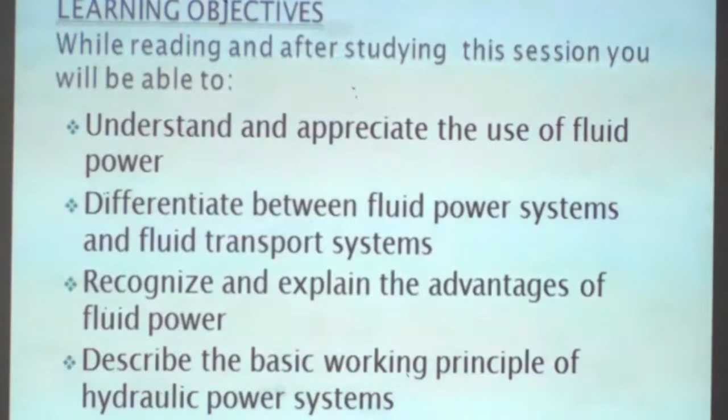After studying this session, you will be able to understand and appreciate the use of fluid power, because this hydraulic valve has power. Differentiate between fluid power systems and fluid transport systems, recognize and explain the advantages of fluid power, and describe the basic working principle of hydraulic power systems. At the end of this session, I hope that everybody who watches this session is able to do these objectives.

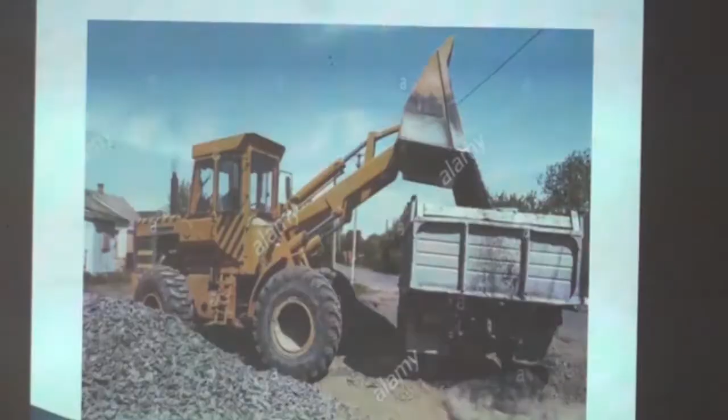The fluid system is applicable on vehicles which unload themselves. For example, to unload stones or sand, the driver uses the hand lever on the directional control valves, which gives the fluid direction to lift up or drop down the body of this vehicle. This system is also used on heavy hydraulic cranes to pack other vehicles. This is an example of hydraulic cranes which pack other vehicles. This is another hydraulic crane which loads sand into other vehicles.

On these hydraulic cranes we have some components. For example, this part is called the hydraulic cylinder. It has the rod. This load can go up or forward for lifting the sand to the other vehicles. That's the reason why we are going to deal with this piston. It works with hydraulic fluid.

This system has some advantages. Almost unlimited power can be produced and maintained. This hydraulic fluid system is to be maintained. An advantage of fluid power systems is that almost unlimited power can be produced and maintained. And easy and complete control: it is very easy to control and to maintain.

A natural springiness that can absorb and reduce the shocks in the system. This means the system is very comfortable because we use fluid. The components can be at a distance with quick power transfer and little power loss. When we use these fluid power systems, there is no need for more power because there is little power loss.

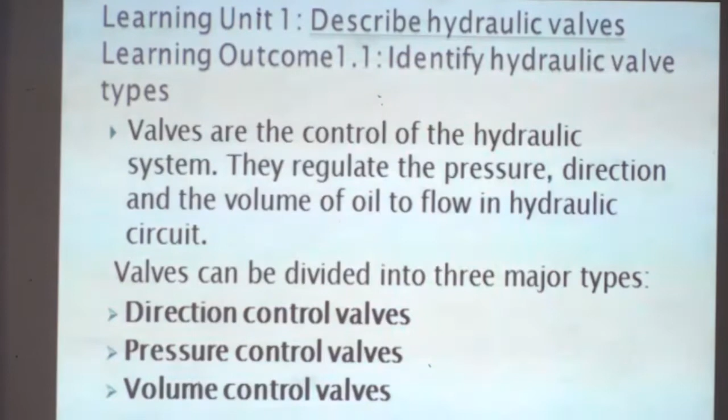This means we have three main types of valves. These valves can be divided into three major types: directional control valves, pressure control valves, and volume control valves. These are the three major types of valves we use in our hydraulic systems.

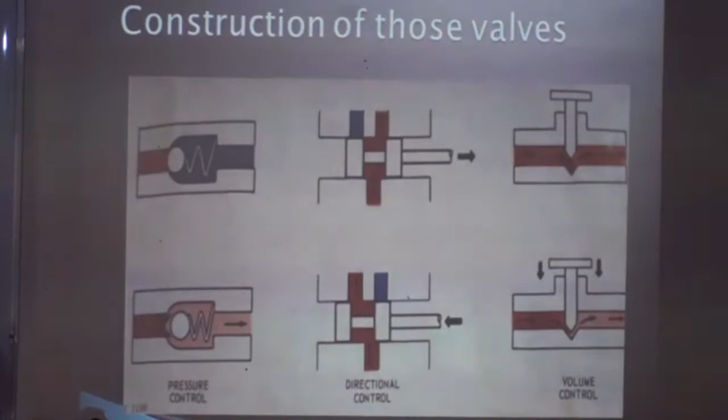As we see here, this is the pressure control valve. On the first figure, we have two colors on this pressure control valve, a red one and a blue one. And this one is the ball. Then this is the spring. As you see, in the second figure, we have an arrowhead. As you see, this ball is open; it is not attached on this part here, compared with the first figure, which completely closes this spot.

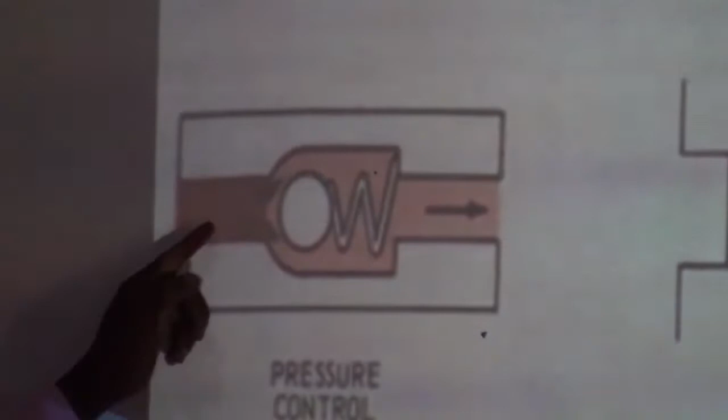On the second figure, the ball gives the passage through which the fluid comes from this side to the other side. It's the reason why we have the arrowhead. That means the fluid flows in this direction. This ball is opened by the fluid pressure: the fluid pressure comes to this side, then compresses this ball, compresses the spring, then the fluid passes through this spot and goes to the other side to do work or to lift.

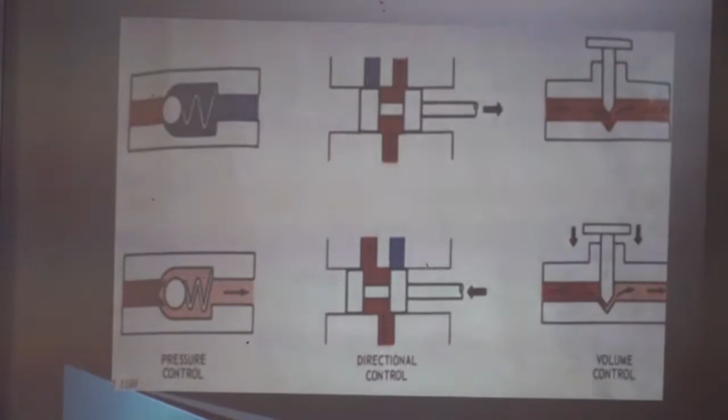As we have seen at first, this fluid can lift up the body of some vehicles, or it helps to park other vehicles on hydraulic cranes. Then we have the second figure, which is called the directional control valve.

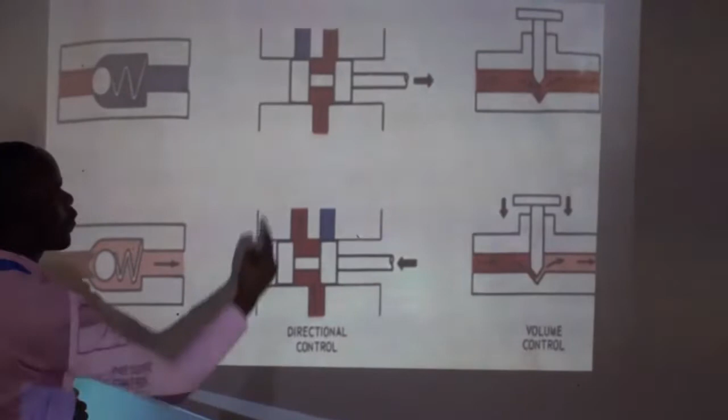Directional control valve means what? On the first figure, we have the arrowhead that shows this load goes forward. This port is communicated with this port. The fluid comes from here, passes outside of this load, then passes to the other port. This port, as you see, is still closed, but this port is opened and is connected, or communicated, with this port when this load goes forward.

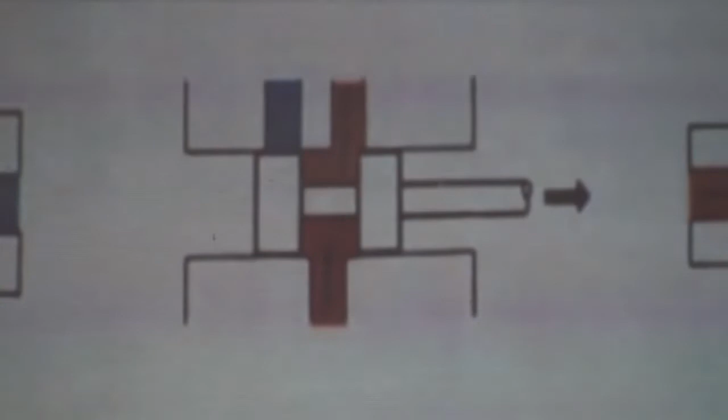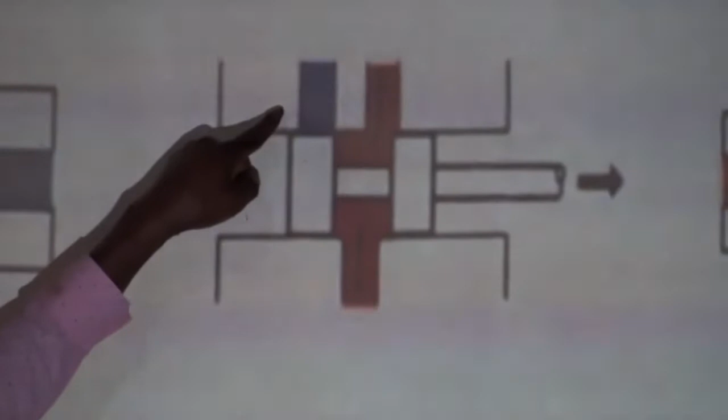But on the second sketch, this load comes back, because we have the arrow which indicates the direction, that is, the load comes backward. This red one is the fluid pressure. Fluid pressure on this spot is communicated to this spot, as differentiated from the first figure. The red color goes from one port to the second port. Means this port is communicated to this port. This port is closed. This is the directional control valve.

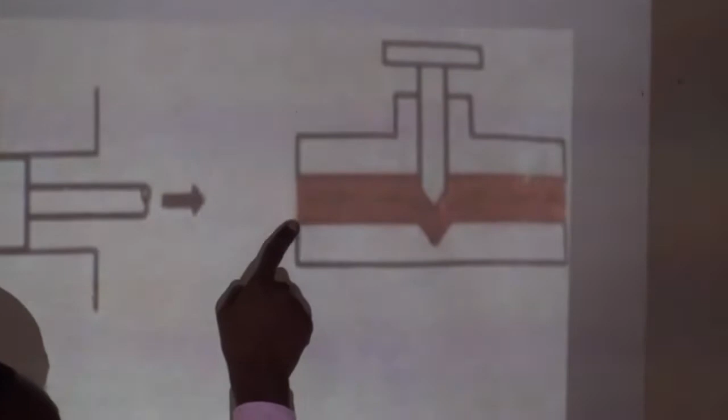On the last figure, we have the volume control valves. This volume control valve shows how the volume or the rate of the fluid passes through the hydraulic systems. Here on the first figure, we have the red color only, but as you see, this adjustable nut gives the space here. This arrowhead shows that the fluid goes through freely on these volume control valves. We see that the adjustable nut goes down.

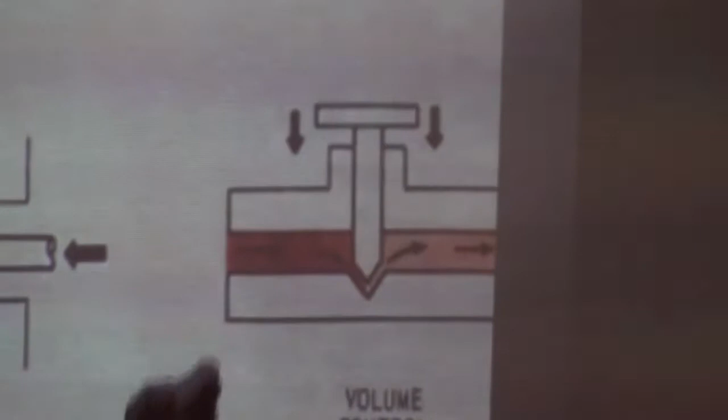When you screw down or decrease this volume or this space, the fluid passing this spot decreases compared to the next part. This is the volume control valve. This volume control valve adjusts or regulates the quantity of the fluid that flows through our systems.

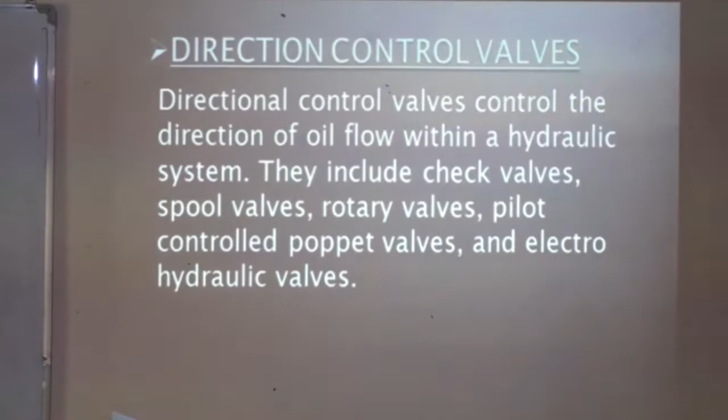Let's go to the directional control valves and show how they function. The directional control valves control the direction of oil flow within any hydraulic system. They give the direction or orientation of the fluid in our systems. They have subtypes of valves: check valves, spool valves, rotary valves, pilot controlled poppet valves, and electro hydraulic valves. Those are the subtypes of the directional control valves.

Let me go on to the volume control valves. Those volume control valves, or flow control valves, are used to reduce the rate of flow in a section of a hydraulic circuit. It's to reduce the quantity of fluid flowing in our hydraulic circuit, resulting in slower actuator speed. Needle valves and flow control valves regulate oil flow in one direction, allowing free flow in the opposite direction.

Then let me go on to the pressure control valves. They are found in virtually every hydraulic system, and they assist in a variety of functions, from keeping system pressures safely below a desired upper limit to maintaining a set pressure in a part of a circuit.

These pressure control valves, as a function, keep systems working at a constant pressure, without changing the pressure we need in our hydraulic system. This pressure control valve maintains a constant or set pressure we need in our system.

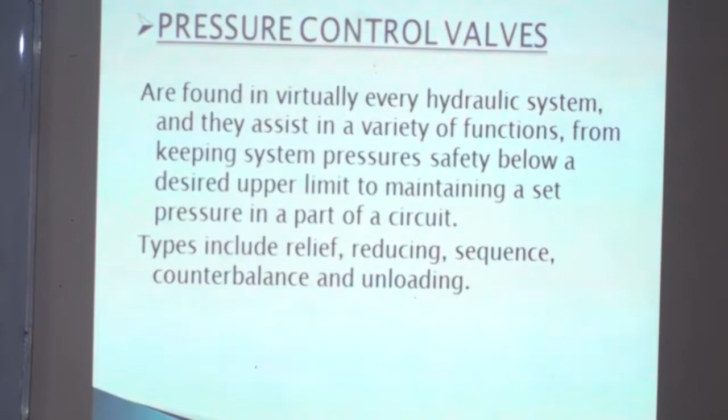The types of pressure control valves include the subtypes called the reducing, sequence, counterbalance and the unloading valve. Then we have other valves called the non-returning valves. These non-returning valves have the function of allowing a medium to flow in only one direction. These non-returning valves allow the fluid to flow in one direction without reversing in the other direction.

A non-returning valve is intended to ensure that a medium flows through a pipe in the right direction, where pressure conditions may otherwise cause reverse flows. The second function of these non-returning valves is to give orientation of the flow of fluid in the direction of our systems.

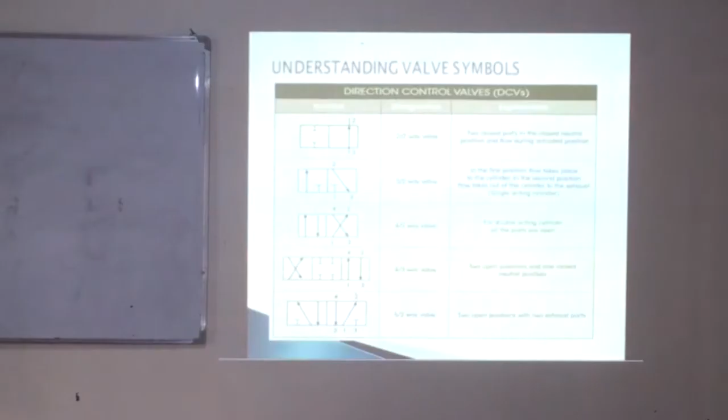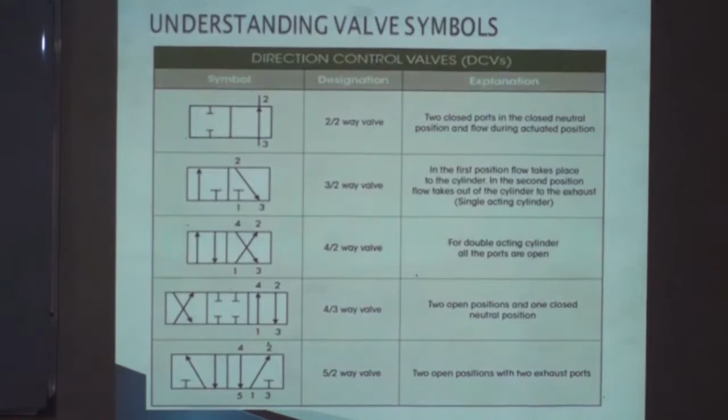Those valves have symbols. We use many types of symbols in our hydraulic circuits, in our hydraulic systems. We start with the directional control valve symbols. Understanding valve symbols: we have many different types of symbols. Here we have the symbols we use for the directional control valves. The first one is called the 2/2-way valve. 2 means what? 2 means what?

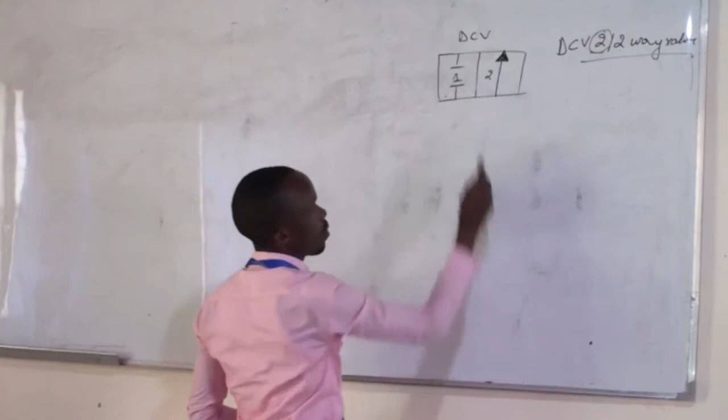On this type of directional control valve symbol, that is the directional control valve called the 2/2-way valve. The first two means 2 ports. The second two means the number of positions. On our directional control valve symbol, this is the position. This is position 1. This is position 2. That's the reason why we have 2 positions. And that 2 means the number of ports in each position.

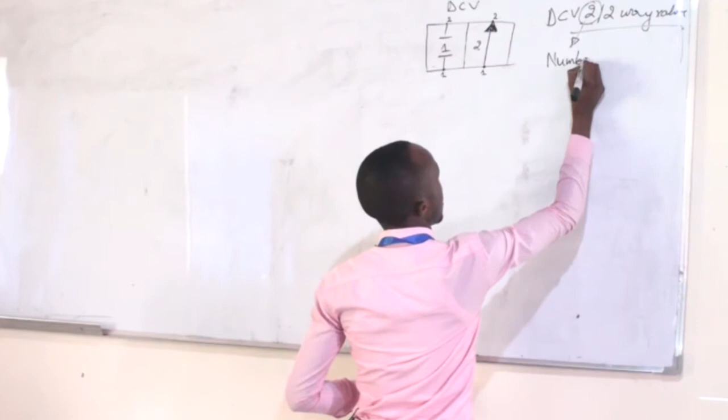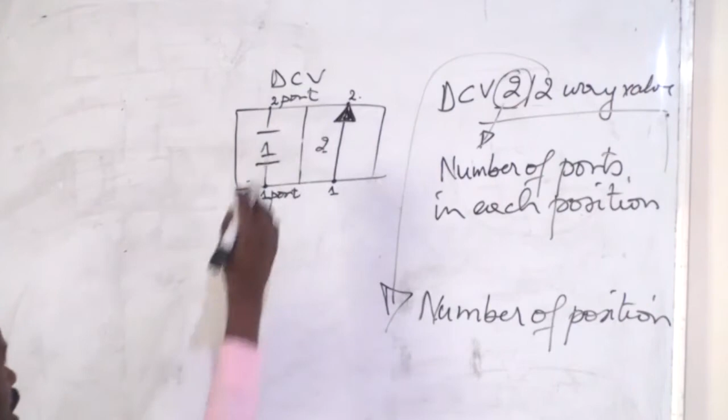Yes, the port. This is port 1. This is port 2. In each position, even in the second position, we have two ports. This is port 1. This is port 2. Yes. We have seen that the first one is the number of ports in each position. The second 2 is the number of positions. I'll show you. This is port 1, port 2, in each position. This is position 1, this is position 2.

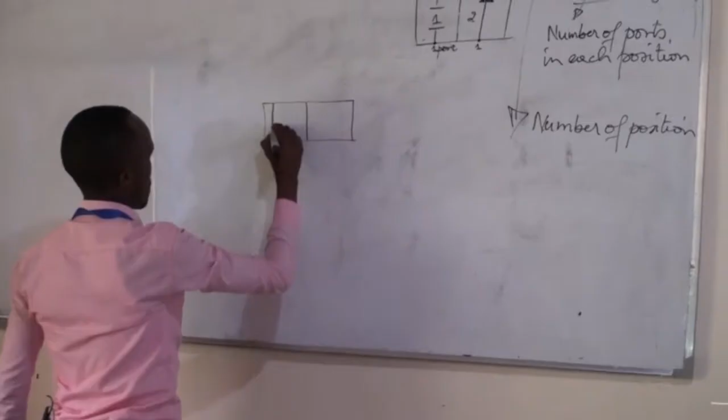Yes? Let's continue with the directional control valve called the 3/2-way valve. This directional control valve is different from the first directional control valve. This is the symbol of the directional control valve called the 3/2-way valve. Means what? This is the number of ports. Then 2 is the number of positions.

We have seen that this is port 1, port 2, port 3, in each position. In the second position, you have port 1, port 2, port 3. This is the first position. This is the second position. This is what we have: 3 ports. Then we have the number of positions.

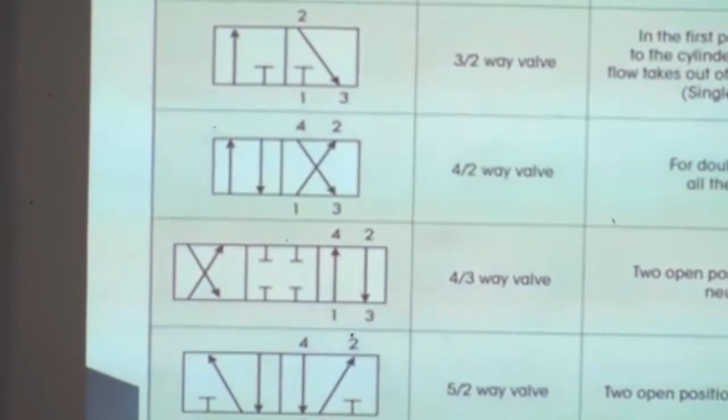Number of positions. Let me continue through the other symbols of directional control valves, called the 4/2-way valve. Means what? This type of directional control valve has 4 ports, 4 ports in each position. This is the port. This is the port. As you see, this type of directional control valve, called the 4/2-way valve, is totally different from the first types. So this is position 1. Then in the second position, we have port 1, port 2, port 3, port 4.

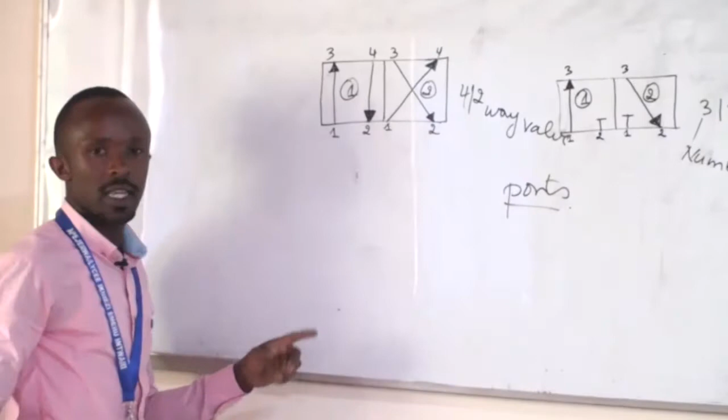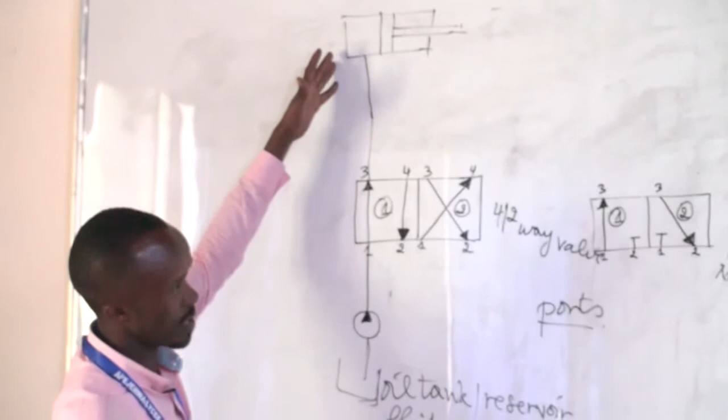Let me explain what is called the port. The port is where the fluid enters inside the directional control valve, and where the fluid goes out of the directional control valve. For example, in our hydraulic circuit, we have another component called the hydraulic pump. This pump takes fluid from the reservoir. Then this fluid goes up to supply the hydraulic cylinder with pressure.

Then we have other directional control valves, called the 4/3-way valve. Let me explain the directional control valve called the 4/3-way valve. We have the symbol. As you remember, this 4 means the number of ports. The 3 is the number of positions.

On these types of directional control valves, let me show you the number of ports. Firstly, let me show you the number of positions. We have position 1, 2, 3. This is the number of positions. Then you have the number of ports on each position. We have port 1, port 2, port 3, port 4.

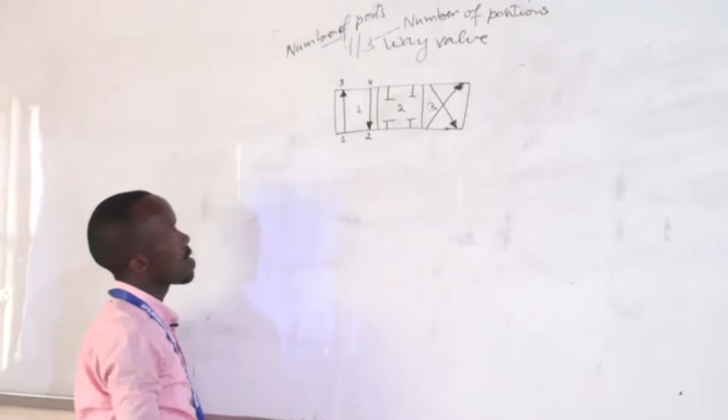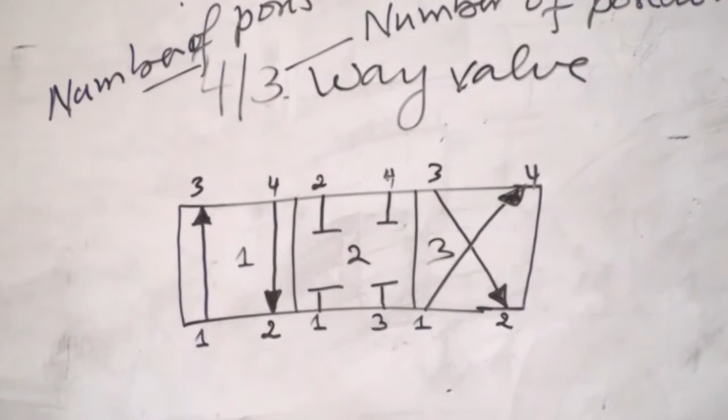On the second position, we also have 4 ports: port 1, port 2, port 3, port 4. Then, in the third position, we also have the 4 ports: port 1, port 2, port 3, port 4. The same as the previous directional control valves, this is the directional control valve called the 4/3 way valve, the symbols.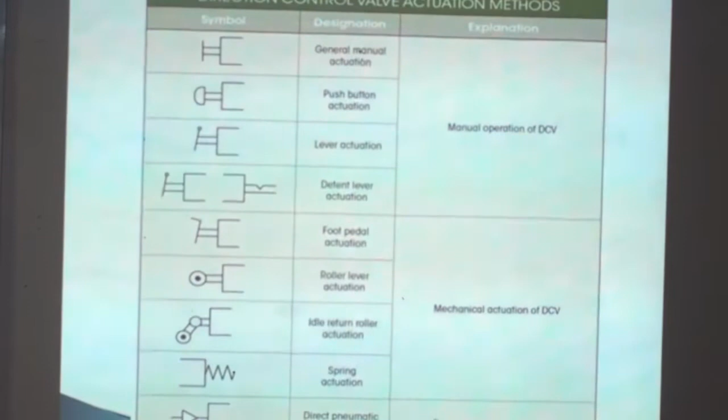These types of directional control valves have an actuation method. On this position, we need to change the positioning according to the work you need to do. For example, these directional control valves are used on hydraulic cranes. When you need the cranes to load other materials, for example stones or sand, we need to select or actuate the directional control valve.

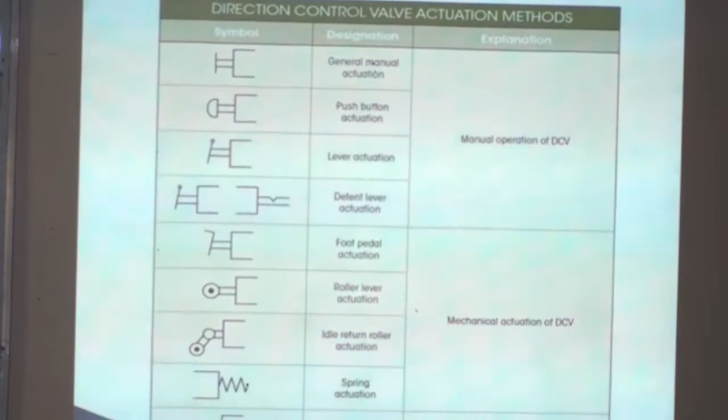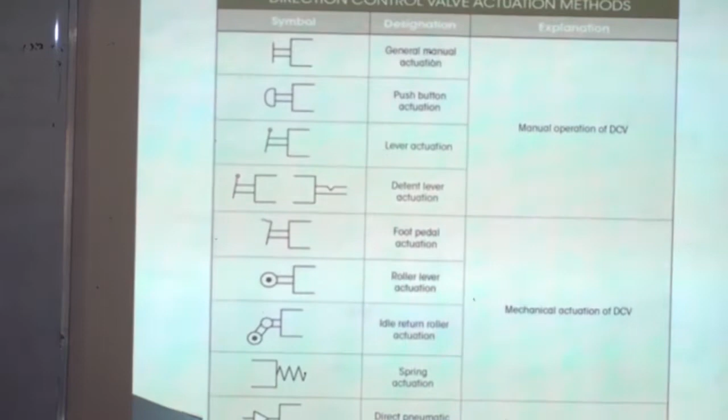That's why directional control valves have a method of making an action which lets the cylinder on the hydraulic crane actuate or do work. We have the symbols of the actuation method, and I'll show you how to add the symbols to the directional control valve. For example, we take the symbol called lever actuation or hand lever actuation. We put this hand lever actuation on this side of the valve.

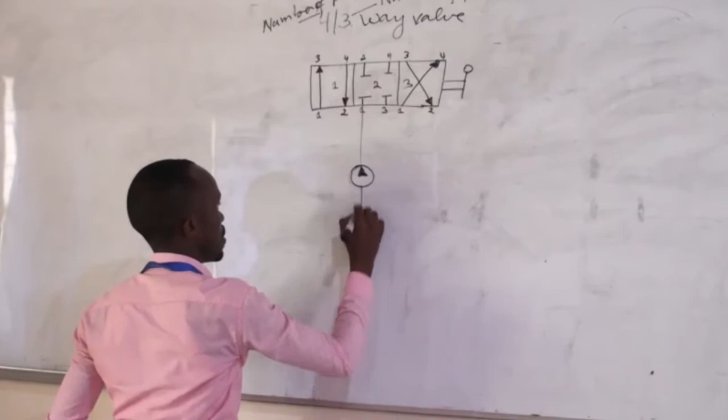This is the symbol of lever or hand lever actuation, which actuates this directional control valve in order to do work, bringing the fluid from the hydraulic pump, coming from the hydraulic tank or hydraulic reservoir. This fluid goes to the cylinder. For example, this is a simple sketch or simple circuit showing how the fluid circulates in our hydraulic system.

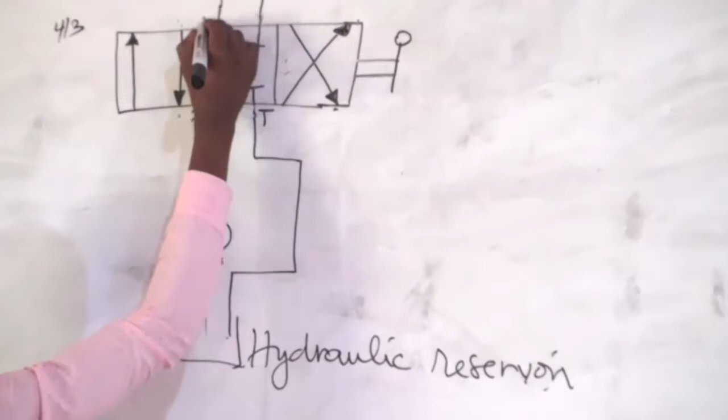As you have seen, this is the number of ports. Let me clean this one, then the number of positions. Let me show you how to actuate this hand lever actuation on the directional control valve called the 4/3 way valve. This port, when connected to the hydraulic pump, is called P. This port is called T. This port is called A. This port is called B.

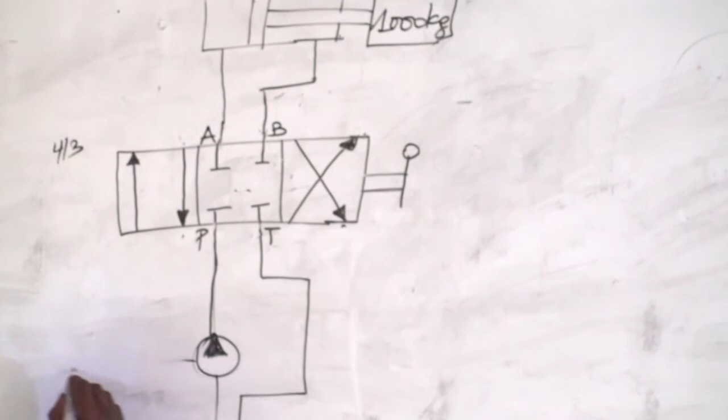Let me explain these letters. P means the fluid pressure from the pump, supplied to the cylinder to do any work. For example, on this cylinder we have a load. This fluid comes from the hydraulic tank or hydraulic reservoir through the hydraulic pump. This pump supplies the fluid with pressure to the cylinder, passing through the directional control valve.

As you see, in this position there is no connection between port P and port A, and no connection between port T and port B. This means this position is the neutral position, called 0. This means there is no action on the hydraulic cylinder. If you need to do any action on the hydraulic cylinder, we actuate this hand lever actuation.

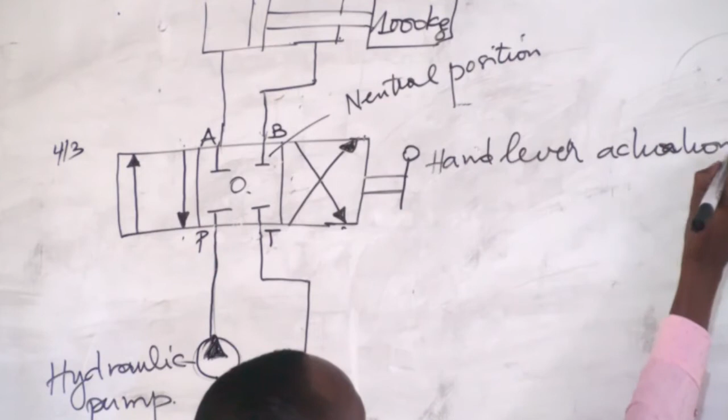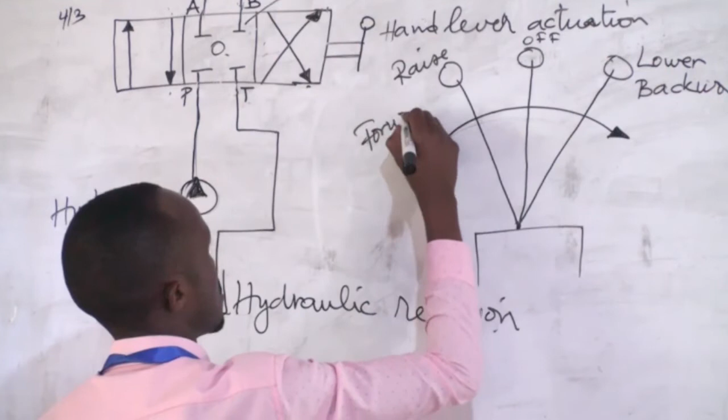This is the hand lever actuation. Here it has three positions. The first position is off, the neutral position. This position is called lower, or backward. This position is raise, or forward. Let me explain how this lever is actuated in order to lift up this load or return the hydraulic cylinder to its initial position.

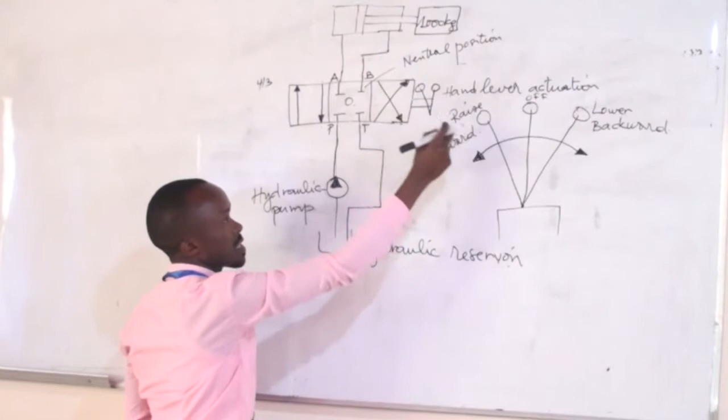When you select this hand lever in the raise position, the lever comes into this position, same as here. When selected in this position, this is rise. What does it mean? Port P is connected to port A. Then port T is connected to this port. Port A is connected here, and port B is connected to this port.

Let me show you how it is. This is port P from the pump. This is port T from the cylinder; let me clean this port. Then port B is connected to this one. When the pump rotates, the fluid is supplied from the hydraulic reservoir to the hydraulic cylinder. This is the hydraulic cylinder.

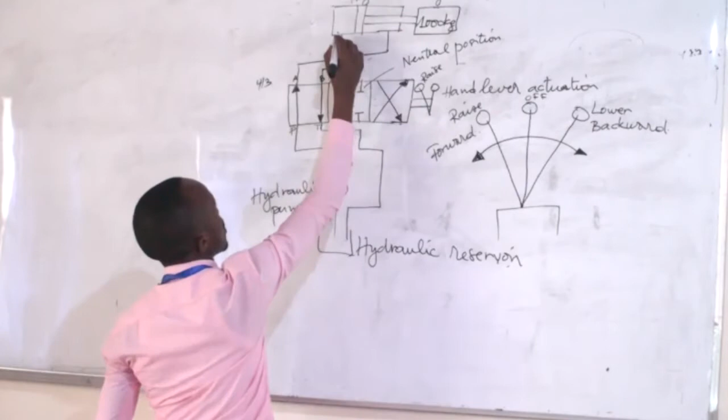This is the hydraulic cylinder. It passes through this directional control valve. The fluid comes from the hydraulic reservoir and passes through the hydraulic pump. In this port, P means the pressure, or from the pump. It passes through this way. This way is connected to port A, then passes into this chamber. The fluid comes into this chamber with high pressure.

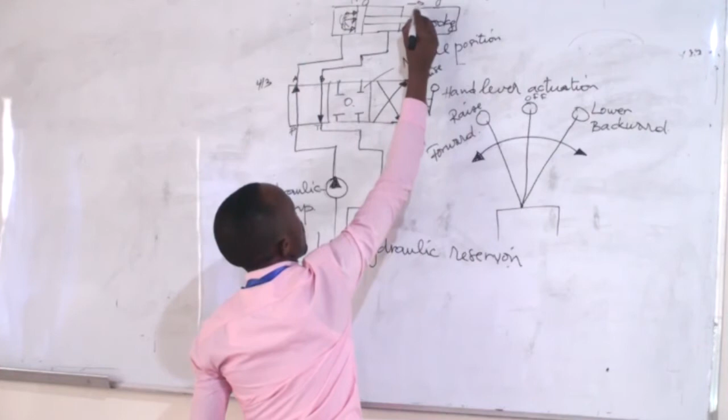Then it presses or pushes this piston. This piston is connected to this rod. This rod comes in this direction or comes back. Forward, it goes up or lifts this rod. Then here we have the other fluid in this chamber. This is called the rod chamber.

This fluid comes from this way, then port B is connected to port T. T means tank or reservoir. Means what? This fluid comes back to the reservoir. This is when you select or actuate the hand lever in this position for rising or for forward.

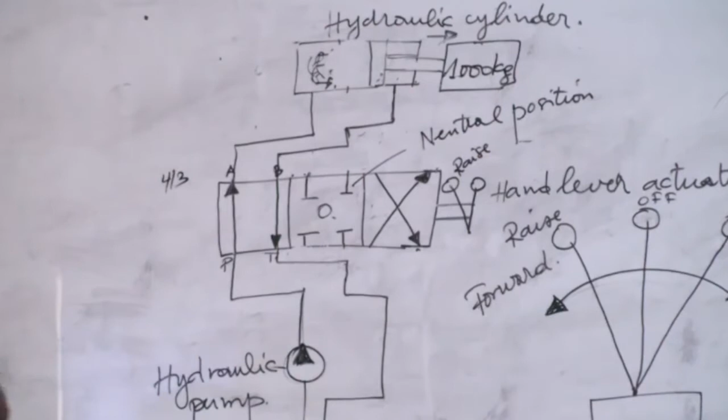Then let me see how this rod, at the end of this action, for example, comes here. So we need this rod to come back to the initial position. That's the reason why you need to select or actuate the hand lever in the other position, the lower or backward position. You have just seen that this rod comes out, lifts, or moves forward in the hydraulic cylinder.

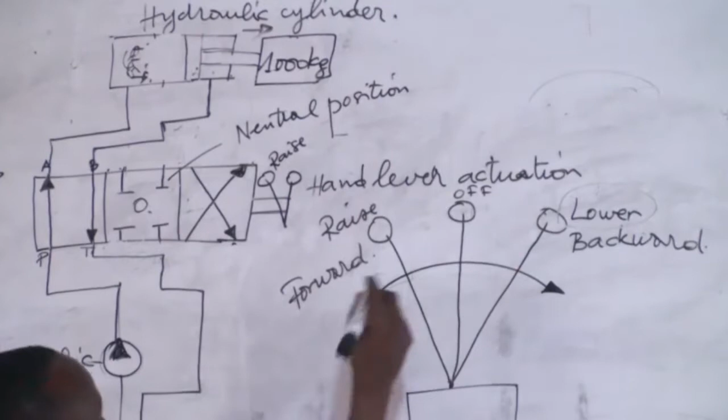Means what? We need to bring the piston and the rod inside. We need to actuate the hand lever in the lower position. We need to do this one. This is the lower. When you select or actuate the hand lever in the lower position, the directional control valve changes position. This port is P, this port is T, this port is A, and this port is B.

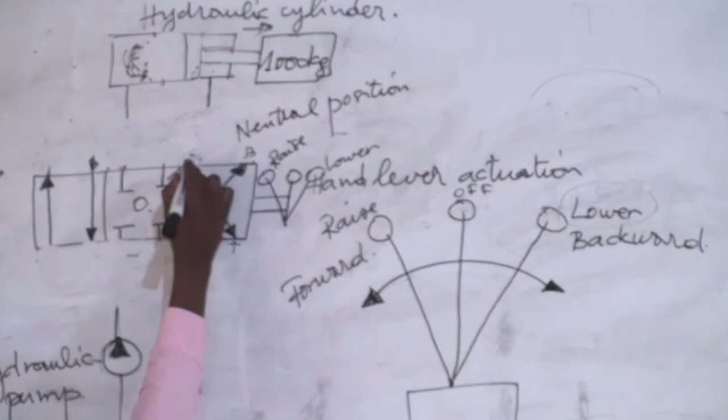Let me show how those connect. Yes, this is port P, which comes from the hydraulic pump. Yes, connected to port P. Then T is the return to the tank or the hydraulic reservoir. That's the reason why we must connect it to the return. Then the port A.

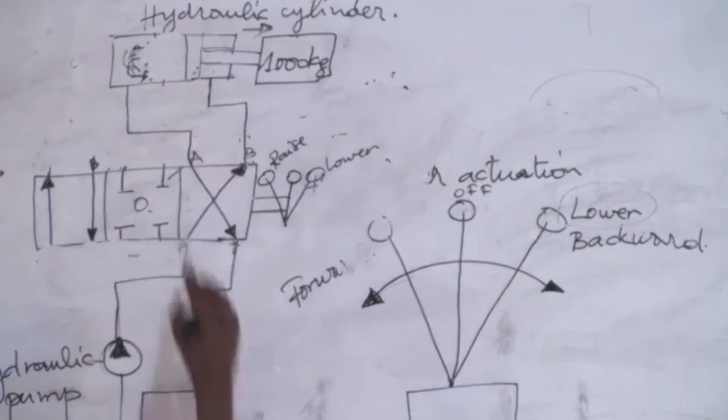This hydraulic pump gives the fluid pressure, which comes from the pump through port P to port B. This fluid pressure comes to this chamber, called the rod chamber. Then this fluid applies pressure to the piston and pushes it in this direction. Means what? This rod and the piston come back to the initial position.

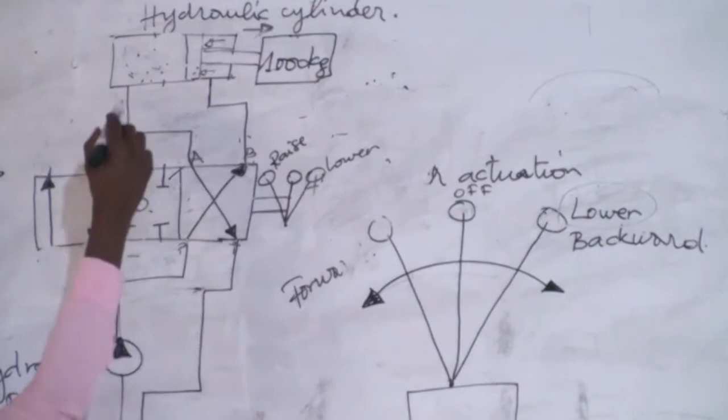Then the fluid that was in this chamber, called the piston chamber, comes back to port A. Then this fluid goes to T. T means the tank or the reservoir. Then it comes back to the hydraulic reservoir. Means what? Finally, the rod and the piston come to the initial position.

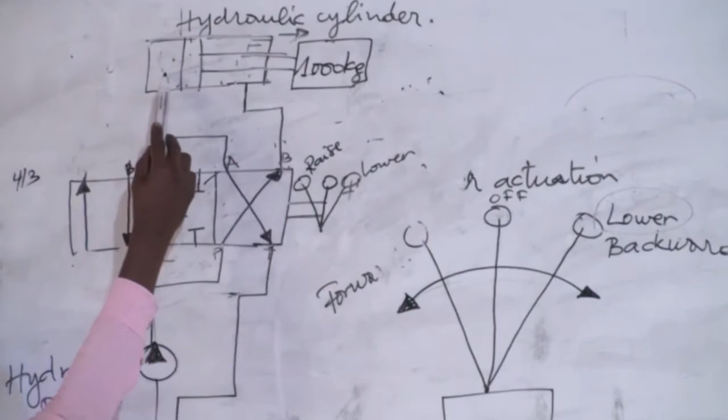Because the fluid pressure comes from the pump, passes from port P to port B, comes into the rod chamber, and pushes or presses the piston to the initial position. Then the fluid in the piston chamber goes from port A to port T, back to the hydraulic reservoir.

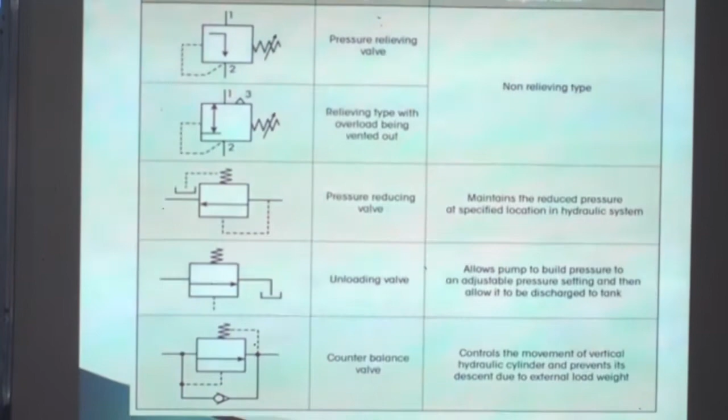Let me continue with the pressure control valves. We have different types, or different symbols, of pressure control valves. As you have seen in the symbols, in general, the function of these pressure control valves in our hydraulic circuit is to reduce or protect against overpressure, in order to avoid this pressure destroying some hydraulic components. That's the reason why we install these types of pressure control valves in hydraulic circuits.

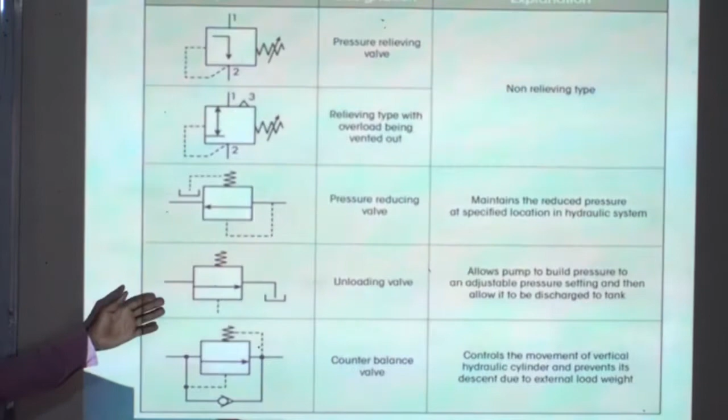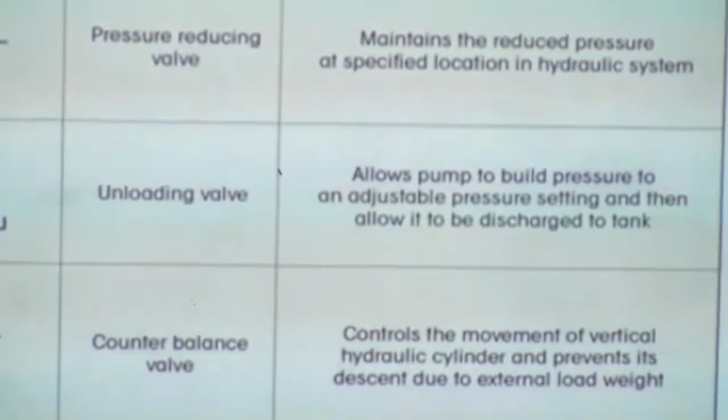For example, here we have what's called the unloading valve. This unloading valve allows the pump to build pressure to an adjustable pressure setting and then allows it to discharge to the tank. When we have high hydraulic pressure in our circuit,

this unloading valve permits the fluid to come back to the tank, discharging this fluid pressure to the tank, in order to avoid this pressure destroying the hydraulic components. For example, this high pressure can destroy directional control valves or the hydraulic cylinder. That's the reason why we have pressure control valves functioning in our circuit.

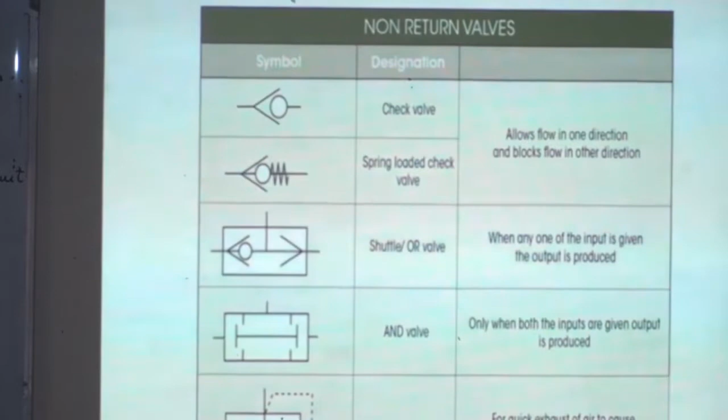Then we have the last valve, called the non-return valve. We have many different symbols of non-return valves, but their function is to permit the flow of oil or fluid in one direction and block the flow in the other direction. For example, we have what's called the check valve.

This is the symbol of the check valve. This check valve permits the fluid to flow in one direction and blocks it in the other direction. This valve is composed of, this is the ball.

This is the ball. The fluid comes from this direction. This fluid is passing through these check valves, can pass through these valves because this fluid comes in with pressure. Then this pressure of fluid presses this ball, then lets it pass through this port. Then the fluid continues to pass on the other side.

But otherwise, when the fluid comes from this direction, this fluid has more pressure. Then this pressure presses this ball to this port, closing it totally so the fluid cannot pass on the other side. It's the reason why it's called a non-returning valve.

As you have seen, its function is to allow flow in one direction and block flow in the other direction. It permits flow in this direction, but blocks it in this direction. As we have seen in our hydraulic system, here we have a simple circuit. Let me show you, let's watch the animation on how the hydraulic system or hydraulic circuit works.

Hi, welcome back. With the help of this animation and explanation, let's learn how a direction control valve and hydraulic ram exactly work.

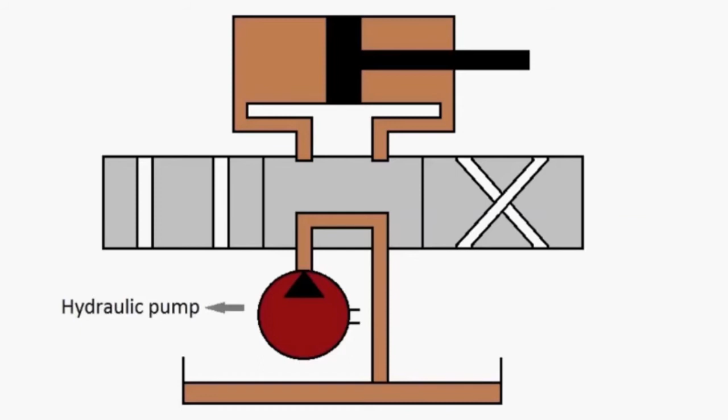First, let's identify the components. That's the reservoir. Then we have the hydraulic pump, and the symbol of the hydraulic pump is being shown there. Then that's our direction control valve - this is a 3-position, 4-port direction control valve. That's our hydraulic ram, or the hydraulic cylinder, and you can also see the piston and the piston rod marked over there.

That's the head side of the hydraulic ram. It is called the head side because the head of the piston comes at that section, and the area of the cylinder at that position will be more when the piston is at center, compared to the rod side. You can see the rod side there - that's the side where the piston rod supporting the piston comes, so the area will be less at that part. There you can see the oil flow path, the path through each section through which the oil flows from the hydraulic pump towards the hydraulic ram. Now let's watch the animation and learn how exactly it works.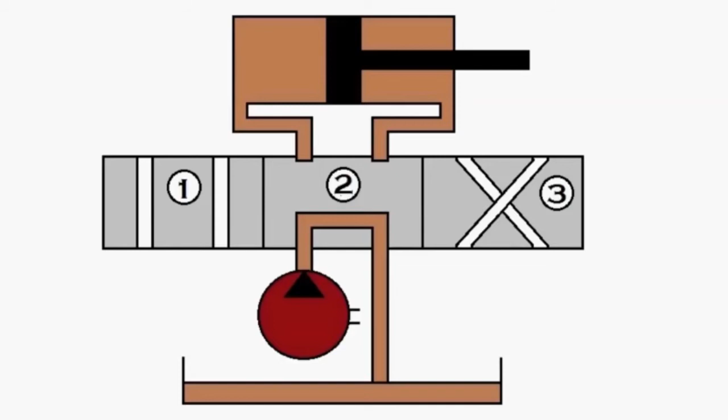Here we have 3 sections or 3 positions for the direction control valve, as you can see, 1, 2 and 3. The second position is the neutral position, which we'll discuss first. In this position, the flow from the hydraulic pump, as the color indicates, goes directly back to the return line or towards the reservoir. So this is a neutral line - the flow is not connected to the hydraulic ram, so work is not happening at this point in the hydraulic ram.

Now let's move the direction control valve towards the right, position 1. Now section 1 connects between the pump and the hydraulic ram. Here you can see the flow from the hydraulic pump, the arrow mark, moving through the hose directly towards the head side of the hydraulic ram, and it pressurizes the hydraulic piston. The piston gets pressure at the head side, resulting in it moving towards the rod side. So the oil from the rod side moves through the return line and goes back towards the reservoir. That's how the hydraulic ram works when the direction control valve is at position 1.

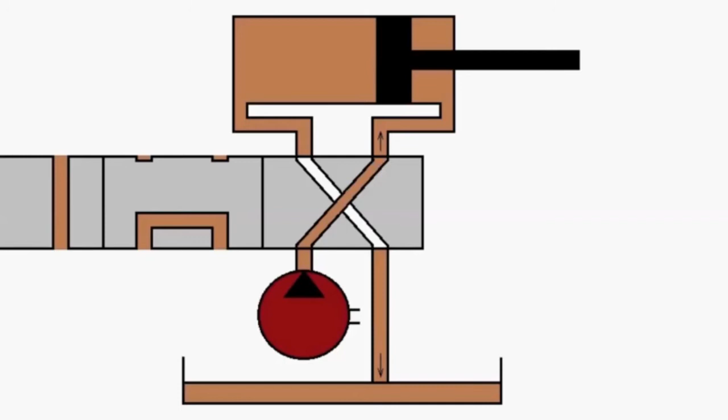Now let's see the other case. We are moving the direction control valve towards position 3. Here the flow from the pump is getting reversed - you can see the flow going towards the rod side of the hydraulic ram, the arrow mark. It hits the piston at the rod side, pressurizing it, resulting in the piston moving towards the head side. So oil from the head side goes back through the return line towards the reservoir. So this is how this particular circuit works, how the direction control valve controls the flow or redirects it towards the hydraulic ram, resulting in it to work. We believe you understand its working.

As you have seen in our session, we have learned and studied many different symbols related to the hydraulic circuit. Let me give you a small exercise concerning our session, a sample full exercise. Let me write here - yes, this exercise, a small quiz.

This is a short quiz. The question means you need to build the hydraulic circuit, the hydraulic system, which is composed of the following hydraulic components, in 5 minutes.

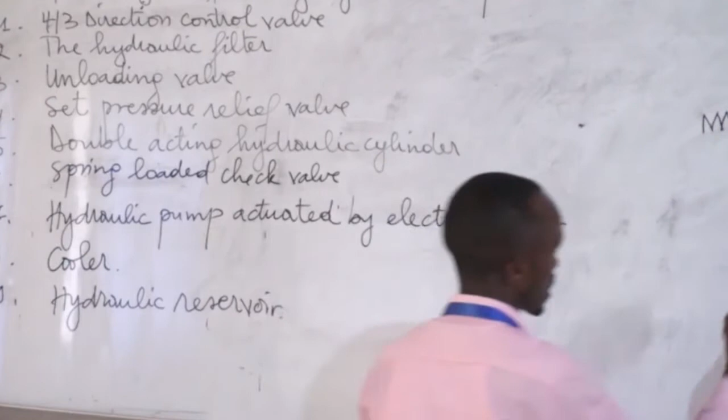Then we have the component called the spring loaded check valve. Then we have what's called the unloading valve. This is the unloading valve.

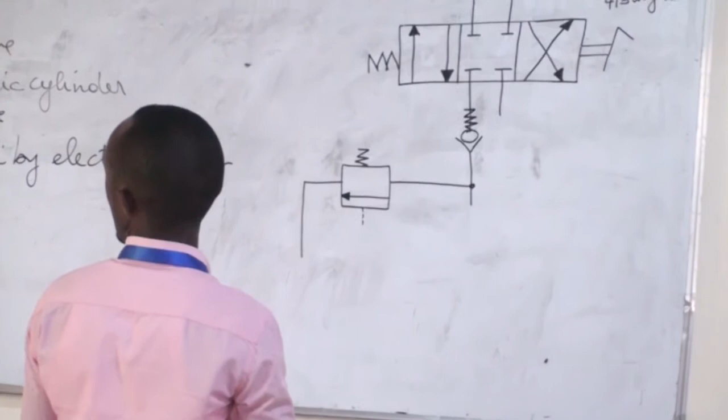Then let me continue to the hydraulic pump. This is the hydraulic pump, which is actuated by the electrical motor. Yes, this is the electrical motor which actuates it.

This is the hydraulic valve. Then we have the hydraulic filter. Yes, this is the hydraulic filter. This is the symbol of the hydraulic filter.

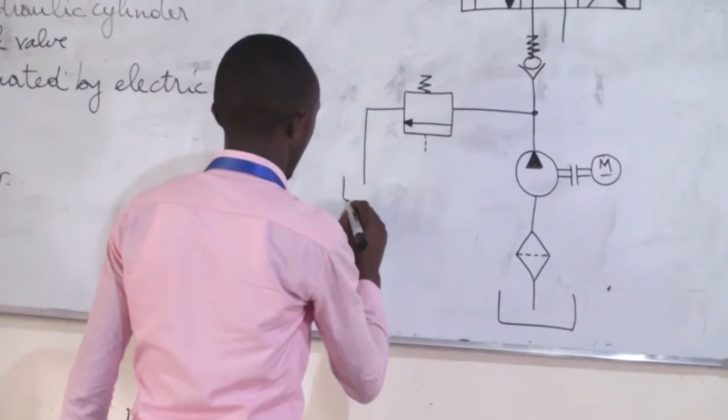Then you have the hydraulic reservoir. Yes, this is the symbol of the hydraulic reservoir, the vented hydraulic reservoir. Even here we have the hydraulic reservoir.

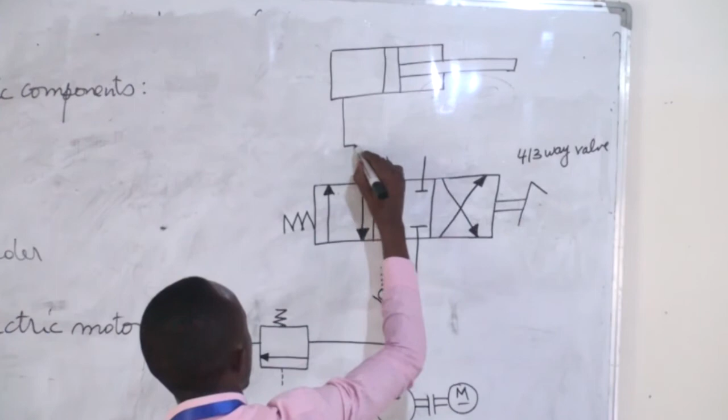Then let's put in the double acting hydraulic cylinder. Let me show you the symbol of the double acting cylinder. Don't forget

to give the name of each port. This port is called P. This port is called T. Then this port is called A, and this one is called B. This P means pressure from the pump. Then T is the return of fluid back to the hydraulic reservoir.

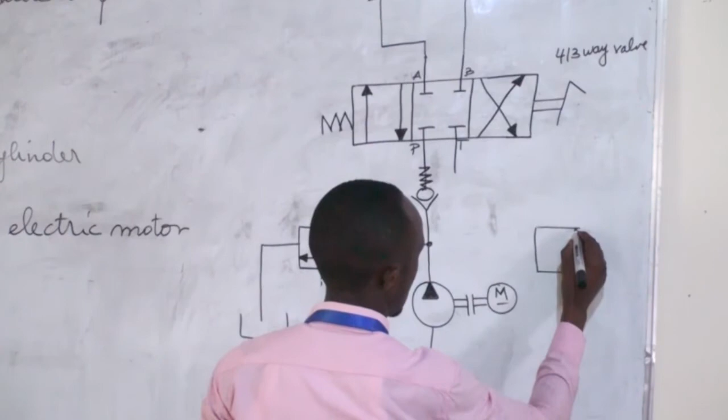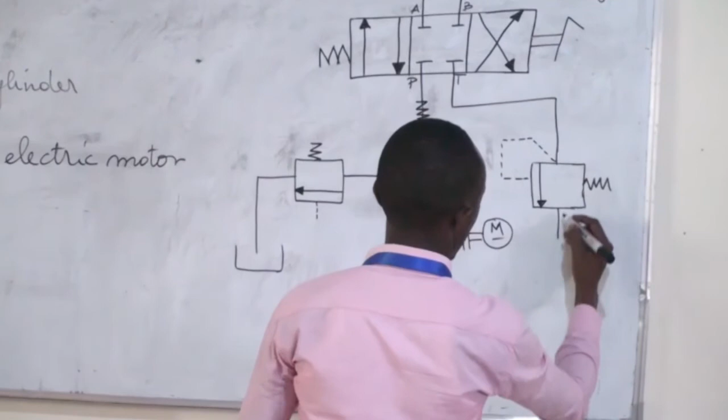Then you have another component called the cooler, then the set pressure relief valve. Yes, the set pressure relief valve. This is the set pressure relief valve. Then the last component is called the cooler.

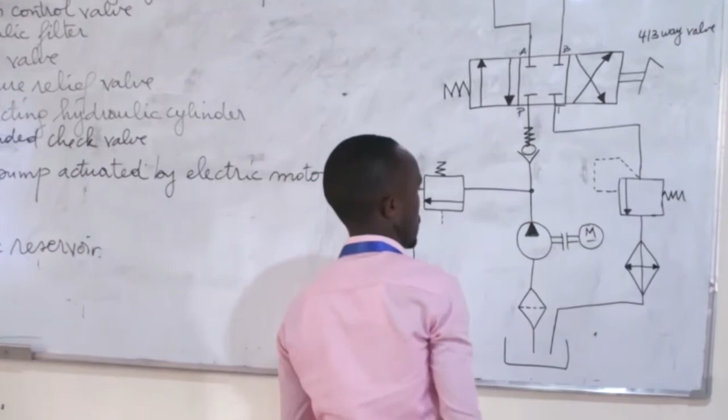Let's name each component. This is the double acting hydraulic cylinder. Then this is the directional control valve, called the 4/3.

This is the spring loaded check valve. Then this is the hydraulic pump. Then this is the electrical motor, which actuates the hydraulic pump, the electric motor. Then this is the set pressure relief valve. Then this is the cooler.

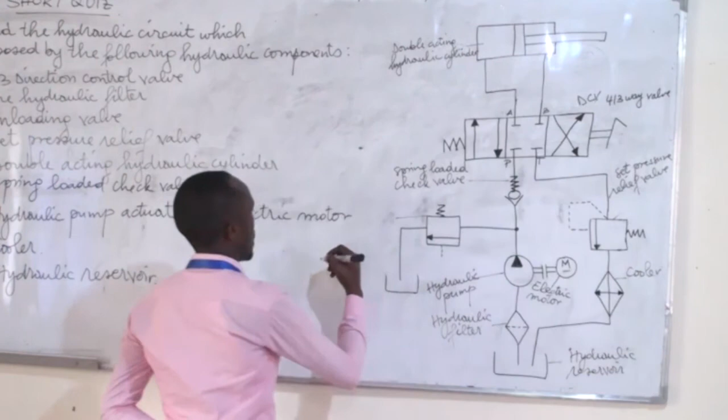This is a hydraulic filter or oil filter. This is the hydraulic tank or hydraulic reservoir. Then this one is the unloading valve.

This is how to build the hydraulic circuit according to these hydraulic components. I think it's clear. Yes.